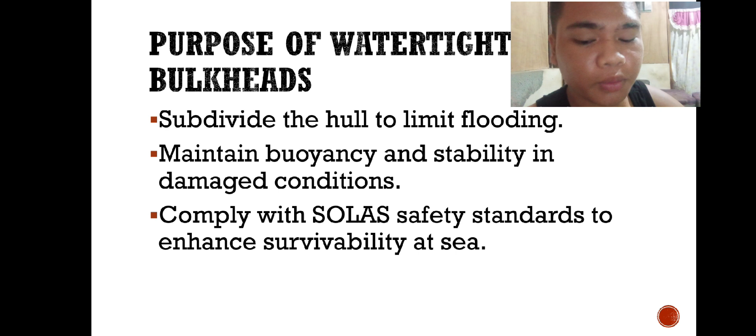Construction of watertight bulkheads in a ship as per SOLAS Chapter II regulation. Introduction and purpose. Purpose of watertight bulkheads: subdivide the hull to limit flooding, maintain buoyancy and stability in damaged conditions, comply with the SOLAS safety standard to enhance survivability at sea.

Designed to subdivide the hull into watertight compartments to preserve buoyancy and stability after damage. Essential for damage survivability and limiting progressive flooding.

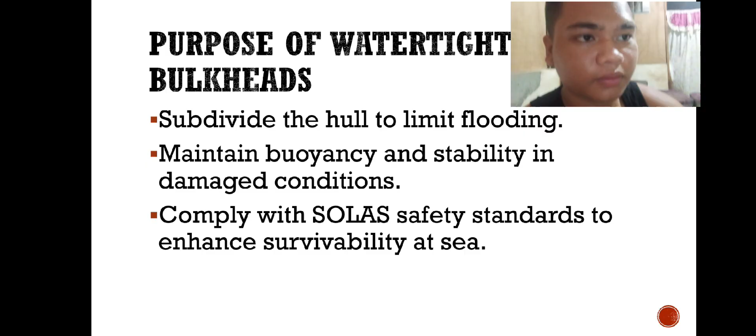Construction requirements. Structural construction standard. Constructed from steel or equivalent non-combustible material. Must be continuous from keel to bulkhead deck. All joints, penetrations and seams must be watertight. Frames and stiffeners should not compromise integrity.

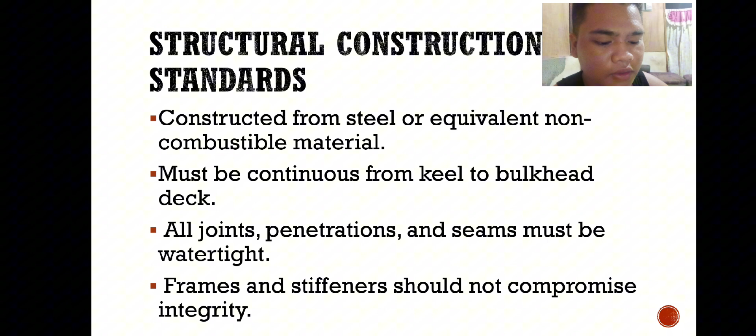Made of steel or other approved non-combustible watertight materials. Bulkheads must be continuous from the ship's bottom up to the bulkhead deck. All joints, seams, penetrations, and hinges must be completely watertight. Longitudinal and transverse framing may be used, but should not compromise watertight integrity.

Bulkhead arrangement by ship type. Bulkhead layout and position. Passenger ship: minimum of 5 transverse watertight bulkheads. Cargo ship: layout depends on the ship length and stability requirements. Key positions: collision bulkhead, after peak bulkhead, at the machinery space and the cargo holds.

Passenger ship: minimum of 5 main transverse watertight bulkheads. Cargo ship: number and location depend on the length of the ship, L, and the required probabilistic damage stability. Bulkheads are located at the forepeak, the afterpeak, machinery space boundaries, cargo holds, and accommodation areas.

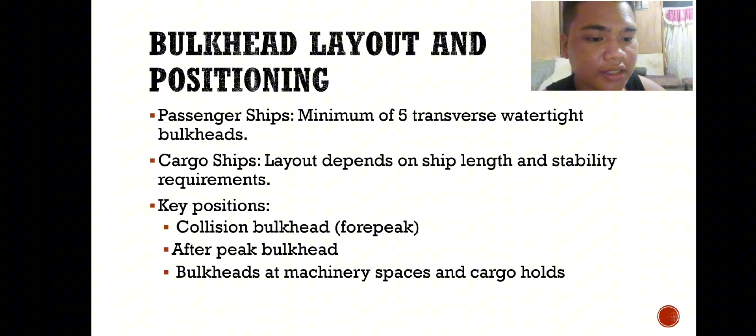Openings and watertight doors. Watertight doors and penetrations. Openings must be minimized and tight-sealed. Watertight doors must be power-operated where required. Equipped with an indicator system. Closed at sea, except under controlled conditions. All cable and pipe penetrations must have approved seals. All penetrations, doors, ducts, cables, and pipes must be fitted with approved watertight closures.

Watertight doors must be power-operated where required. In a passenger ship, have an indicator system for open/close status to be used during navigation, especially in the damage control zone. Openings must be minimized and properly reinforced.

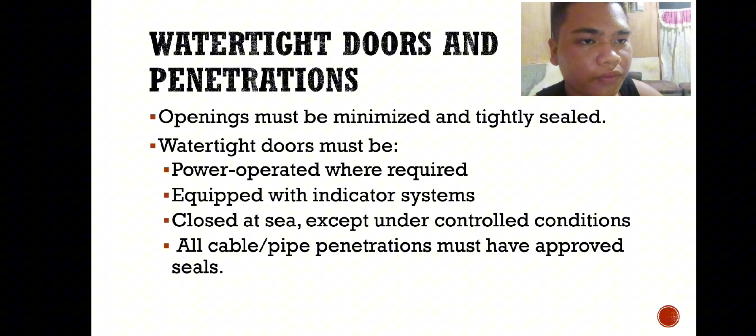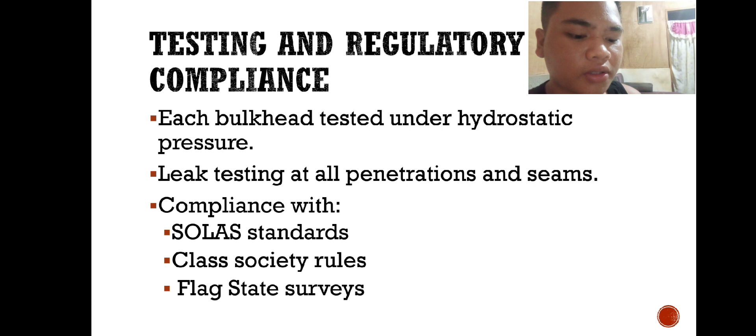Testing and compliance. Testing and regulatory compliance. Each bulkhead tested under hydrostatic pressure, and leak testing at the penetrations and seams. Compliance with SOLAS standards, class society rules, flag state surveys. So, every watertight bulkhead must undergo hydrostatic pressure testing during construction, and leak tests at joints and penetrations. Survey verification must comply with class society rules and flag state requirements.

Maintenance inspection. Maintenance inspection and crew training. Regular inspection per ISM code. Maintenance log to be kept on board. Crew must be trained in watertight door operation, damage control and emergency procedures.

Inspection schedule. Under the International Safety Management or ISM code, crew must be trained in watertight door operation and damage control procedures. Records of tests, inspections, and repairs must be kept on board and available for authorities.

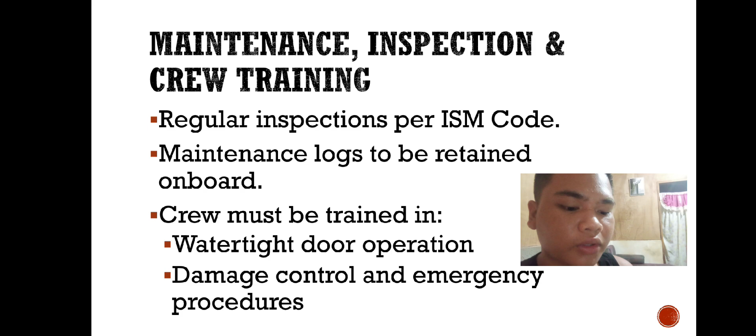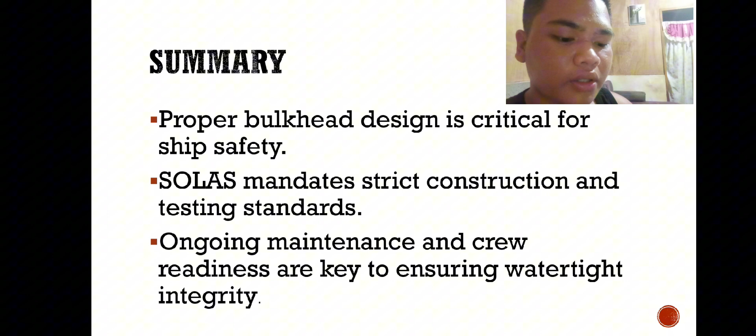Conclusion. Summary of importance. Proper bulkhead design is critical for ship safety; SOLAS mandates strict construction and testing standards. Ongoing maintenance and crew readiness are key to ensuring watertight integrity.